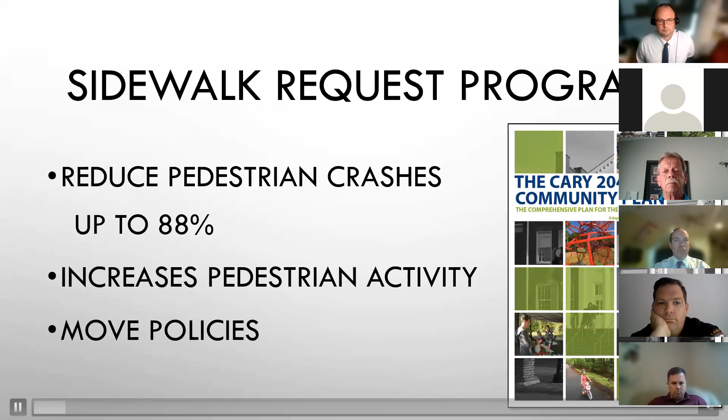Cary's program for constructing sidewalks can help reduce up to 88% of pedestrian crashes along roadways and increase pedestrian activity. You're likely not going to walk to school or the neighborhood store if you don't feel safe. This program is consistent with the MOVE policies in the Imagine Cary plan. Sidewalk program is just one of the reasons why Cary is nationally recognized as a walk-friendly community.

Sidewalks serve everyone, kids walking to school and people walking in their neighborhood, to dinner downtown, or to the bus stop. In addition to a great sidewalk program that makes Cary a walkable community, Cary has an outstanding utility department. Here's a little overview of Cary's utility department, specifically our water utility.

First off, let's talk about who we serve. Town of Cary, obviously, but so many more people than you would think rely on our water service. The Cary Utilities Department provides high quality and safe drinking water to the citizens of Cary, Apex, and Morrisville, as well as the Raleigh-Durham International Airport and the Wake County portion of Research Triangle Park.

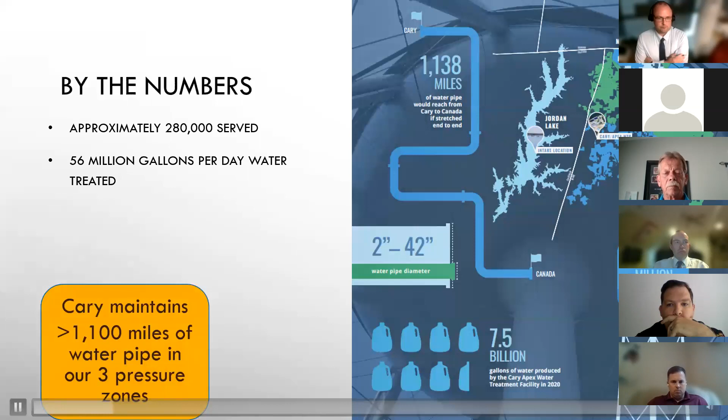The Cary Apex Water Treatment Plant serves approximately 280,000 people. Our job number one, provide clean, safe, high-quality drinking water that tastes great.

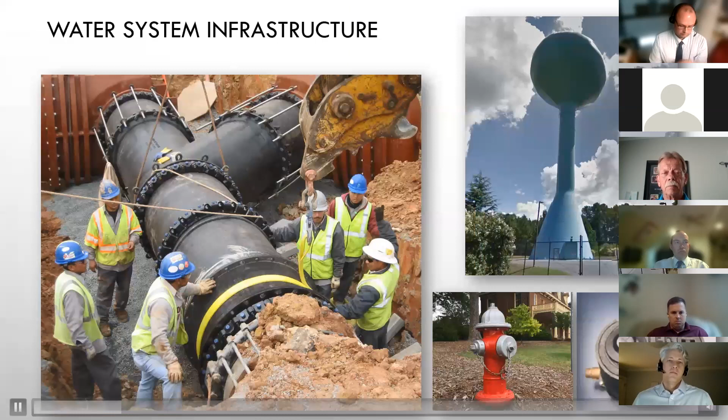Have you wondered how the water gets to you? Cary's water system infrastructure consists of pipes, hydrants, valves, water meters, tanks, a treatment plant, and sampling stations. 1,138 miles of water pipe would reach from Cary to Canada if stretched end to end. All this pipe delivers the water produced by the Cary Apex Water Treatment Facility to your house.

While it takes about 20 hours to treat drinking water, when the water enters the vast pipe network of the distribution system, it can take 3 to 5 days for water to travel to the most remote locations. Because of this, water in elevated storage tanks is turned over on a daily basis.

We take great pride in what we do, as shown by the many awards the Utilities Department continues to receive each year.

Cary's distribution system maintains approximately 21.25 million gallons of finished water storage capacity in our tanks, which is about one day of normal water demand. The fact that the water is stored about 180 feet above the ground creates pressure in the system, and that is what brings the water into your house and into your home when you open the faucet.

The elevated water tanks maintain pressure in the system throughout high demand periods and attenuate peak pumping rates. This way, the high service pumps can operate on a more consistent basis and refill the tanks during periods of the day when demand is low. The tanks also ensure water is available for fire protection and provide instant demand for an emergency such as a fire response or water main breaks.

In 2020, the Cary Apex Water Treatment Facility produced 20.6 million gallons per day, which is enough water to fill 28 Olympic pools every single day.

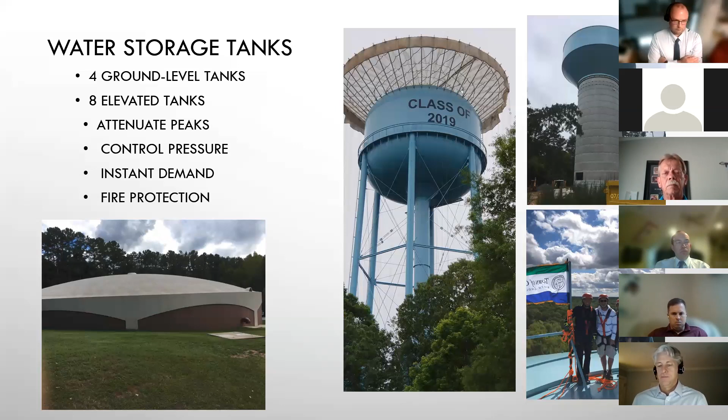Planning. How do we know where, what, and when to build? How do we know we're ready for the future? Cary established its water system in 1923 and has been planning ever since. Master plans map out what infrastructure we need to build, as well as the timing for the construction. Historic master planning work is still relevant today, and the majority of the recommendations were sized appropriately. When you look at the detail of these plans, you see we have been ahead of the curve for decades.

Master planning, both current and historic, takes into consideration the needs of our neighbors such as Apex, Morrisville, Raleigh, and Durham. It details how we should size facilities, not only today, but far in the future. It's how we decide when and where to build things like the proposed 24-inch water main on Northwest Maynard Road.

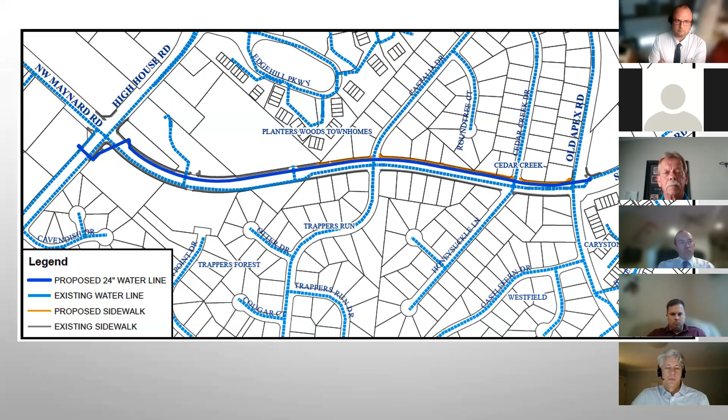The project will improve pedestrian safety and extend walkability. The project closes a 1,700-foot gap of sidewalk on the east side of Maynard Road. The project will increase water transmission capacity and resiliency for current and future development. Paralleling the existing undersized water main with a larger transmission main will increase resiliency in the central pressure zone.

What should you expect during construction? The first thing you will see occur is the relocation of some underground private utilities, such as cable and electric. In addition, there are a few light poles that will move slightly to allow for the sidewalk to be installed. There will be some tree trimming by private utilities, such as Duke Energy, within their easements.

Water main work would then begin from Old Apex Road to High House Road, with connection to the existing water system on either end. Most of the water main will be installed in the outer northbound lane. The existing pavement that is impacted will be replaced and the complete travel lane or lanes will be resurfaced. The water line and trench will be installed in sections with temporary asphalt installed for short durations.

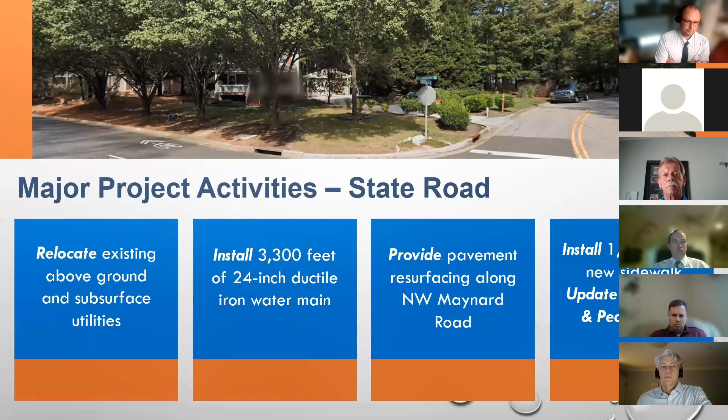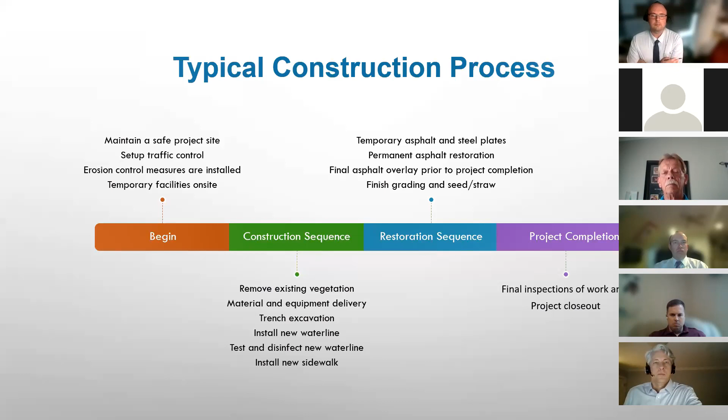When utilities are being installed within the road pavement, lane closures are implemented and traffic patterns are modified. These can be in the form of lane shifts, traffic signal modifications, and detours. The lane closures for this project will be held to a minimum based on the required space for construction, and access to businesses will be maintained.

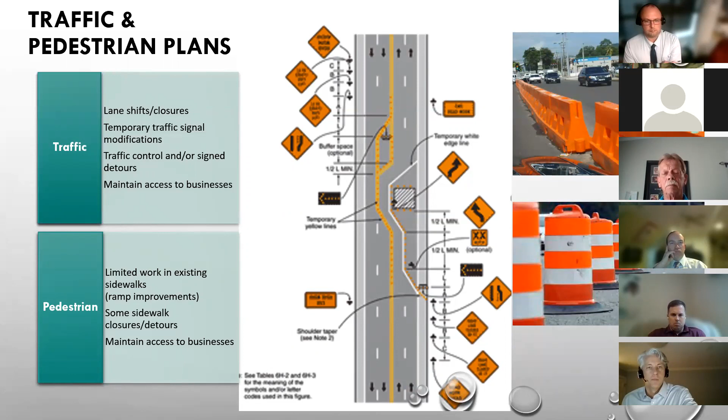Temporary night or weekend work may be required for isolated situations, but typically the active construction will occur during weekdays, Monday through Friday, between the hours of 9 a.m. and 4 p.m.

Cary and the contractor will work to make this a successful, low-impact project while holding in place the goal of a safe work site and maintaining access to each property throughout the project. Lane closures and lane shifts will be utilized, but traffic control will be set up to allow for unobstructed access to properties. Night and weekend construction will be utilized if necessary to shorten construction duration.

Work hours and construction noise will typically be limited to 9 a.m. to 4 p.m. weekdays only. During installation of the water main, water service interruptions are not anticipated.

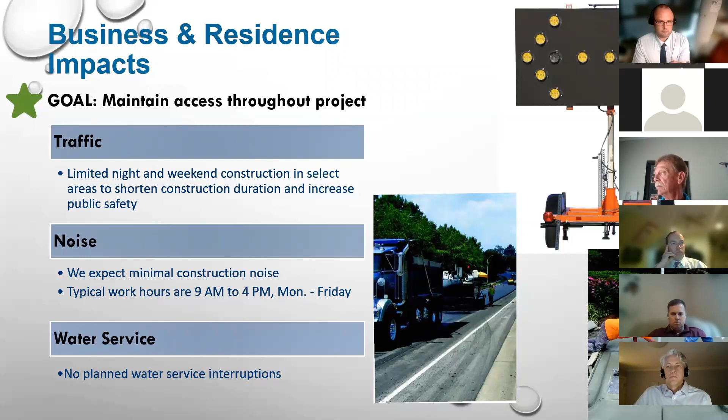So where do we go from here? We are currently working on wrapping up final project permitting and looking to advertise the project for construction this fall. Cary continues to monitor material availability, and current plans would have construction wrapped up by fall of 2023.

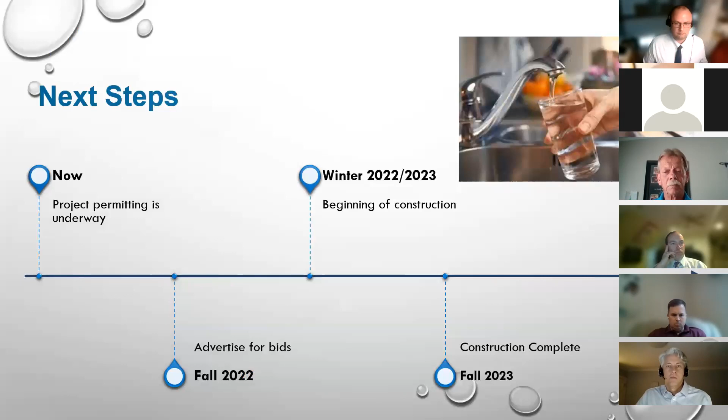Cary is excited to work with you during the construction of the project, and to wrap up, staff is here to help. Please do not hesitate to reach out to 311 or any of tonight's attendees if you have any questions or concerns with this work. Thank you for joining us tonight.

All right, hopefully that video is beneficial to you. I have included some contact information here for the project, and please feel free to reach out to me going forward with any questions or concerns regarding the project.

And now I wanted to take a few minutes to check in on any questions that may have come in the chat. At this point, I don't have any, but certainly people feel free to go ahead and add those questions if they have them.

Going forward, if you don't want to enter any questions or concerns in the chat now, feel free to send them over to me. You can call me at 311, or you can email me. I think some of you already have my email address, so if you give me a call, we can work through any questions or concerns outside of the meeting as well.

We have a question: how do you plan to contact homeowners and renters regarding timelines for utility cutoff and work? It sounded like they're asking if we plan on contacting the residents ahead of construction. Yes, sir, the question again was how do you plan to contact homeowners and renters regarding timelines for utility cutoff and work?